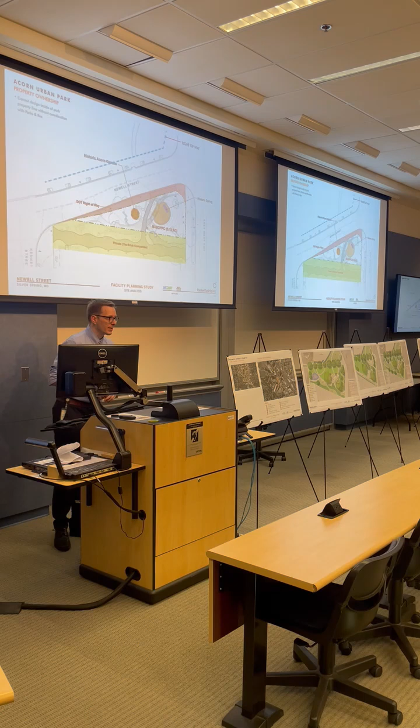So kind of start with what Matt was saying. First of all, nice to be here with everybody. So I remember some faces from last time. But we do want to be very clear.

So what we're studying is what's in the right-of-way up here, so it's really this study. It just so happens that Acorn Park and Newell Street and Acorn Park and this private walk here, they all tie together. So we're trying to look at this comprehensively and what could be. And so we took a step back. We said, what are different options that would make this better?

What we kind of heard from the first presentation was people liked the idea of this being a park. It worked well during COVID.

Families came out, there were kids out. You could actually use these spaces. Right now, you kind of have 2 small parks divided by a street. It doesn't feel safe for kids, doesn't feel like it's usable or user-friendly.

And you kind of see that in COVID, it got used. And now that the street's open, it's no longer used as much, certainly not to the extent it was before, and certainly not by kids, I think. So we kind of stepped back and said there's a lot of opportunities here, and I think we presented that last time.

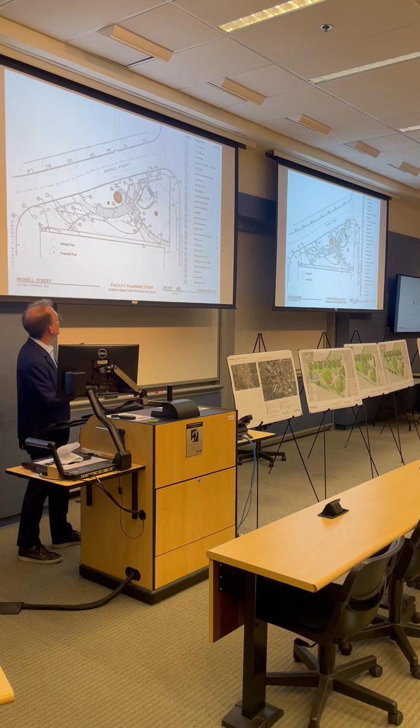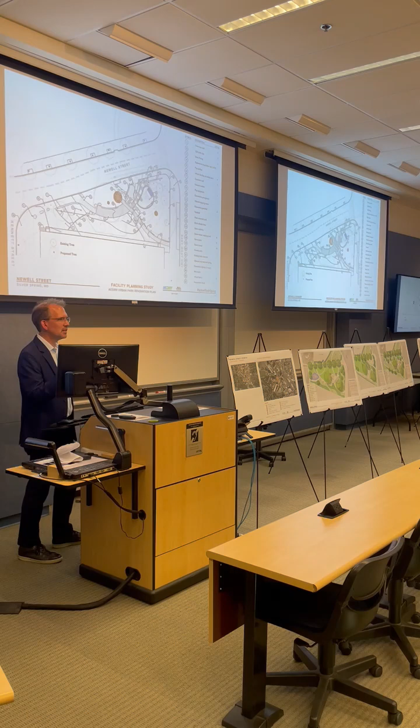Currently, Montgomery County Parks has a plan for the park, and they obviously had to work within the constraints of Acorn Park. There wasn't the ability to extend out into Newell Street or do some of the other more interesting things we see as opportunities here. This will all get coordinated with Montgomery County Parks. It's kind of, let's open our eyes and see what the possibilities are, and then we can work together with Parks and with MCDOT, and they'll come up with a final design at a later date.

These were the concepts we've presented before. You can kind of see one was the no-build option with minimal impact. One was let's close down the street and kind of link things. Circulation-wise through the park, it's separated - you have the street that separates the two parks.

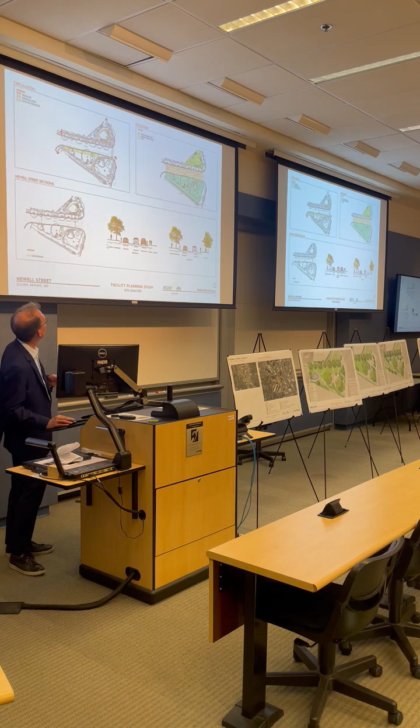Street section through it, you can kind of see what happens here. Right now we have 2 lanes of traffic and a turn lane, or 2 lanes of traffic, depending on where you cut that section. So it's a lot of pavement, especially where there's the turn lane, and it also creates a very large intersection, which I think makes this entire environment inhospitable. You've got 2 streets coming together, and unclear traffic patterns, which I think is hard for people to navigate.

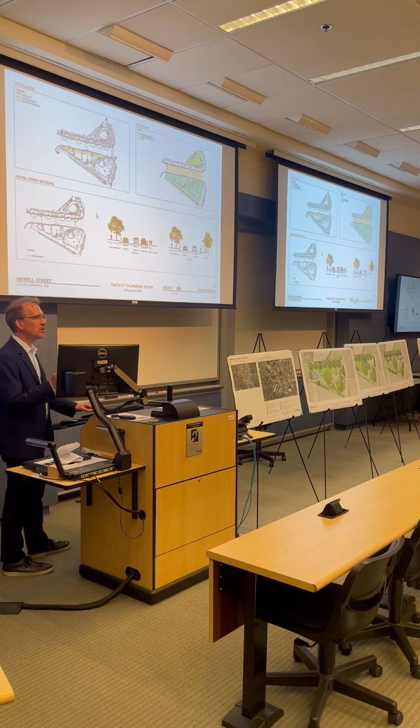So this is another opportunity to clean up some of that traffic pattern, which is where MCDOT said, hey, maybe we can do something here and make this better.

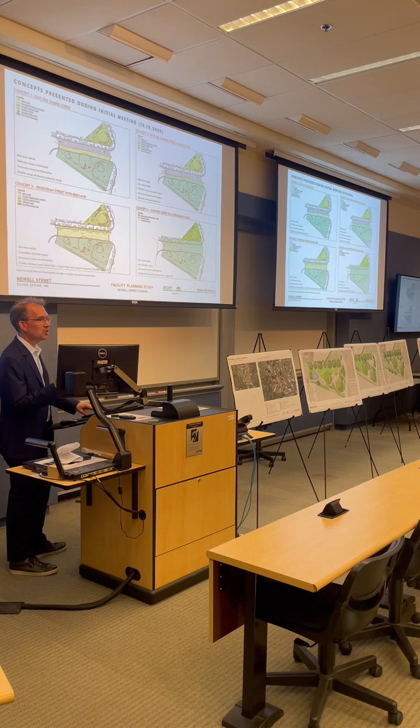These are the concepts we presented before. Concept 1 was like a one-way shared street with bike lanes. One was kind of close it and have shared bike lanes in the street with a one-way. This was a pedestrian street with bike lanes through it, and one was let's do a full park. You'll kind of see shades of these in all the concepts as we develop it, because we don't know that we can just close the street yet. There's a lot more study that needs to go in from transportation and more community input.

So after that first meeting, we heard a lot of things - people liked the idea of this closed street. In addition, there was the idea of just making a park, but also some people said, well, it's kind of nice to have some paved area for kids to ride bikes around, and to have other opportunities. Maybe a farmers market can set up. So I think we wanted to look at all different options as we go through this.

I'm not going to read through all this, but here's a summary of what we heard and the reactions to the different scenarios. I'll let you go through that, but it's in large part what we said - people liked that, but there was some concern about totally closing off. Some people would be okay with a partial closure, but I think that's to be determined.

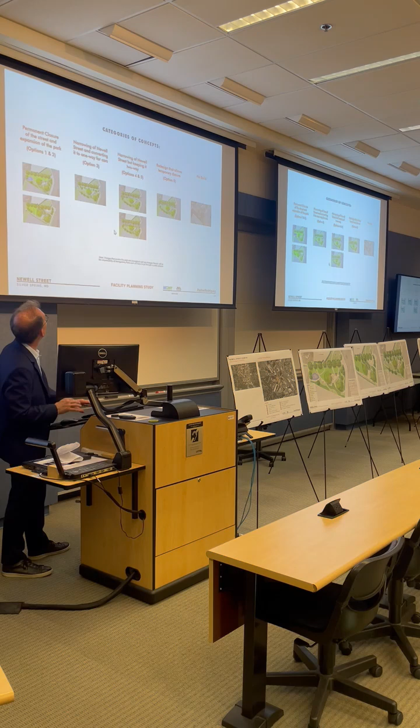So the proposed schemes we have here are just to spur discussion. This was kind of the permanent closure, linking Acorn Park and Acorn Park across the street with some different scenarios. This was keep narrow Newell Street to like one way for cars. Another one was narrowing Newell but keeping it two way with the bike lanes. And then there's kind of a temporary closure, just use it, keep the ability to have the street open. And then there's the no build option, which is always an option, especially if there's not funding.

So we kind of took our hats off and said, what if we tried to use the language of what's already out there in terms of the big sweep that comes through Acorn Park, used as a connecting element to the Acorn Park, kind of celebrate Acorn Park that's constrained on this side with existing street, keep the spring, and then use some of what Montgomery Parks came up with and bring that walkway into the spring.

This becomes the nexus of the design, with another walkway leading out to a nice open play field. We were also looking at doing a small play space for kids here—not quite a tot lot, but more natural or creative play for children.

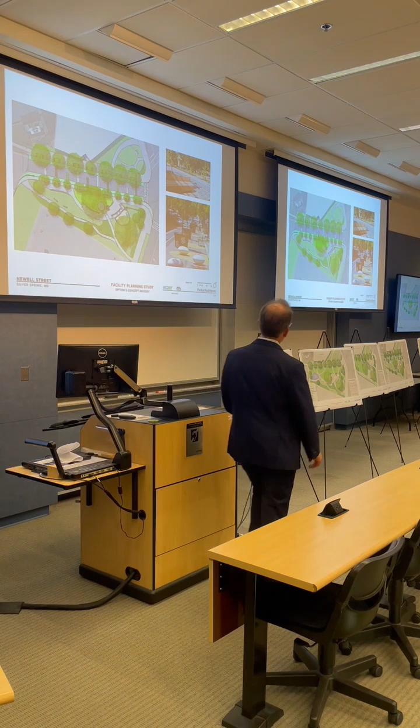I'll circulate through these fairly quickly. They're somewhat similar, but option 1 brought the park all the way across, and I'm just going to step up here. So if you look at option 1, this is really park from Acorn Park all the way to the building wall, and this is all green.

The fire lane that we're keeping would just be like grass. So you really perceive this as one large space.

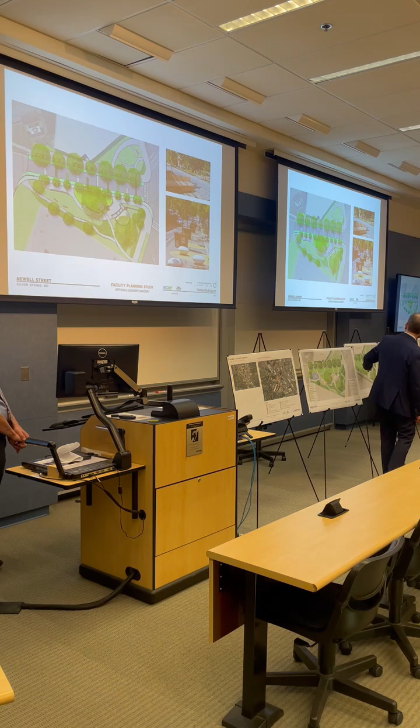This one was similar, but we're again trying to emphasize the Silver Spring and create a low point in here, and kind of give a reason that you could imagine when this was first founded, that water flowed out of the spring and it flowed out, and you could see the reason for Silver Spring, instead of it just being in a well.

This one keeps the street, but does more of an intervention with some of that larger furniture and kind of picking up on the stream and really making the park as wide as we could possibly make it, but providing a vehicular lane through.

This one keeps the street as a definitive street, adds this edge to the Acorn Park, so it enhances Acorn Park, but it doesn't really connect these parks, which I think is kind of the problem that we saw last time. This keeps 2 lanes, keeps a bike lane, and we're also keeping the curbs for the most part. So it's much less of an intervention.

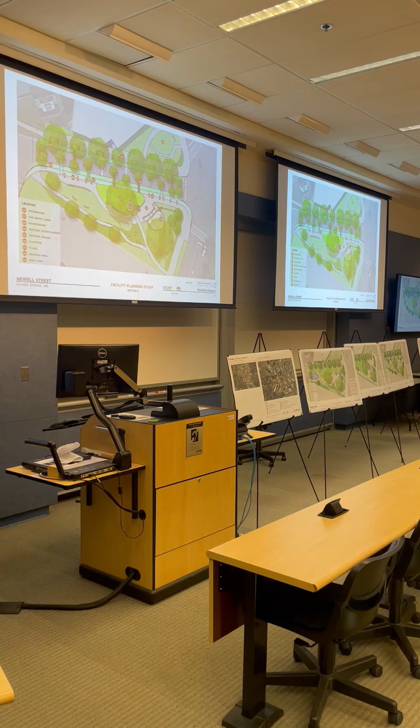It's kind of what we did during COVID, but with a bit more of an enhancement that doesn't make a permanent closure of the street. And again, you could close this for a fair, but I think it's largely the street is open, but with enhancements. And that's kind of a step back from just keeping it as it is, or the no-build scenario.

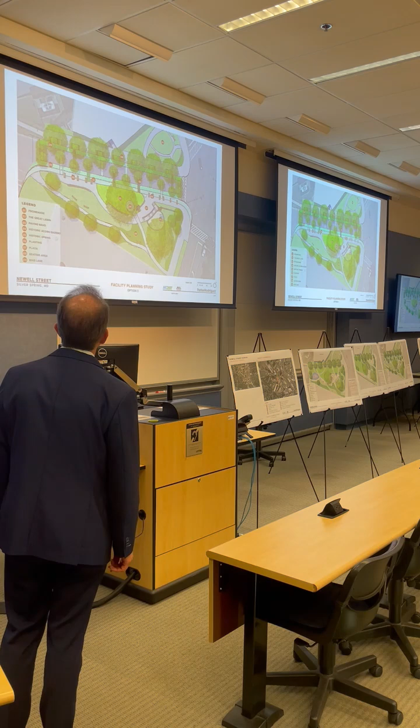And that's what this scenario is showing, right? This is showing it with the planters moved out so that the street's blocked. So this would be a scenario where the street is there, but some event is happening and we've closed it for the day or for the weekend or whatever. That's what this concept is showing, is the moving of those planters to block the street. But that would not be a full-time closure.

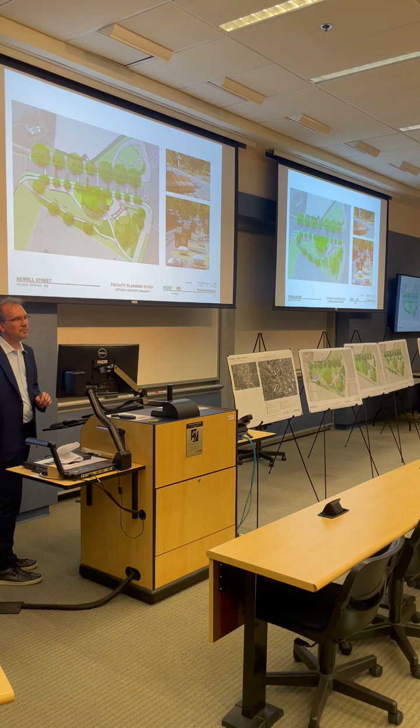I think that's something that could be determined later. These are just concepts, not final. The idea is to figure out, does Newell Street need to be 2 lanes wide, or could we make it a little bit narrower? If it was just 1 lane wide, we could use that other space to expand the park.

Which direction it goes is something that would be determined at the design process, which is not funded. You might have come in later, but the design process is not funded yet. So it could be either direction. If you have a thought on which way you would like it to go, that would be a great comment for us. I want to get to the presentation slides first, and then we'll take more questions.

We're almost done here. So here you can see some of the larger planters that can get moved in, and then like Matt was saying, they can get moved out into the street to kind of close that off. So this idea of we'd have movable planters, kind of akin to that.

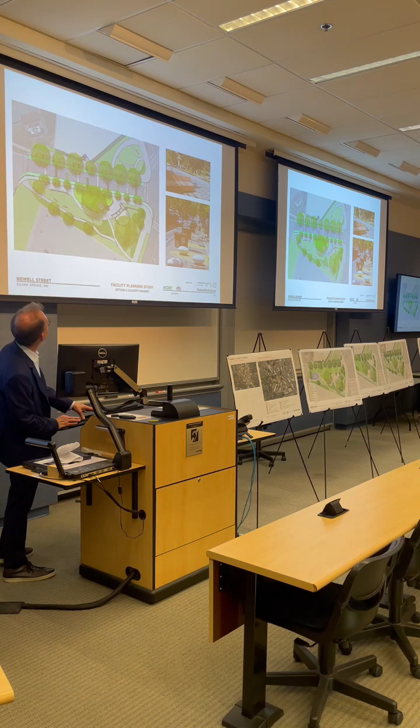They definitely become traffic barriers within that, but then you also have other seating that kind of gets positioned in. These are just concepts, and then you can have some other permanent seating along that edge that kind of enlivens it. But here you can see we're trying to create like a promenade on one side and then still have the street open on the other.

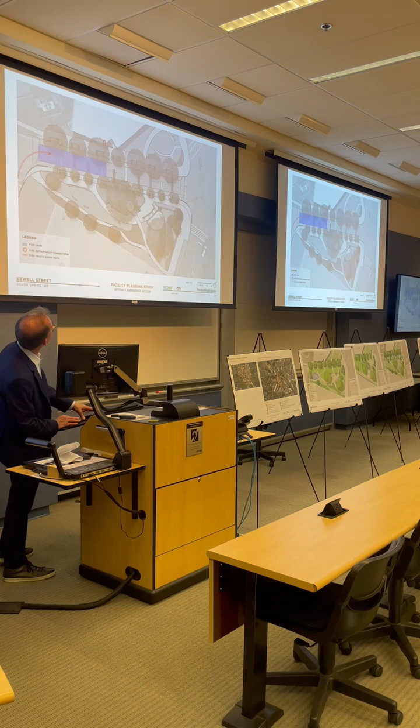All of these, we tried to facilitate as much circulation as possible. I think with the street scenarios, we lose that ability to cross the street. And that's really kind of the shame of all of this, is that you just are not able to knit it together the same way.

But I think it's a public process. There's a lot that needs to be done, from a political level, from a funding level, and it's just to kind of give ideas. If you can't see a way that it could be used, you really don't know what the possibilities are. So these were just, we tried to make them as varied as possible, just to give feedback, and then we look forward to hearing your comments.

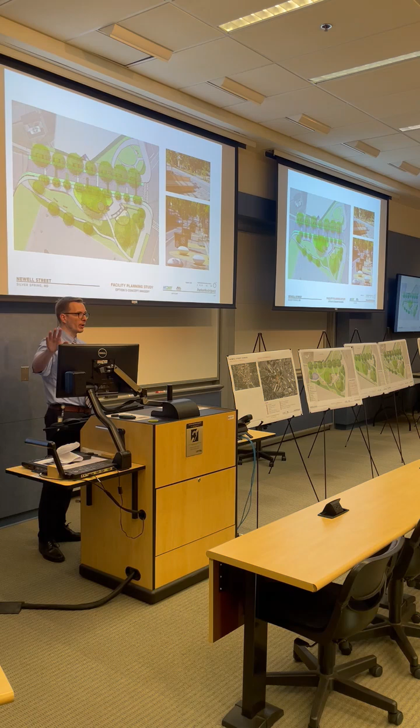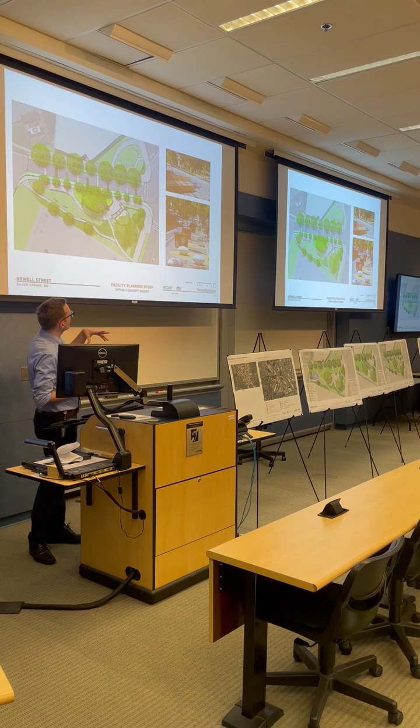Let me repeat the question for the people who are watching later. The question was, how many lanes are here in option 5? This is leaving the curbs alone. There would be 1 lane in each direction and then a bike lane. So instead of having a separate left turn lane at East West Highway, there would be a single lane approach and there would be bike lanes on either side. That's the difference. And that kind of space could be more easily closed, as Dan was just saying.

Right here. I've never done one of these before, so just to clarify, the way to officially submit one's opinion is to come up and talk to you guys after.

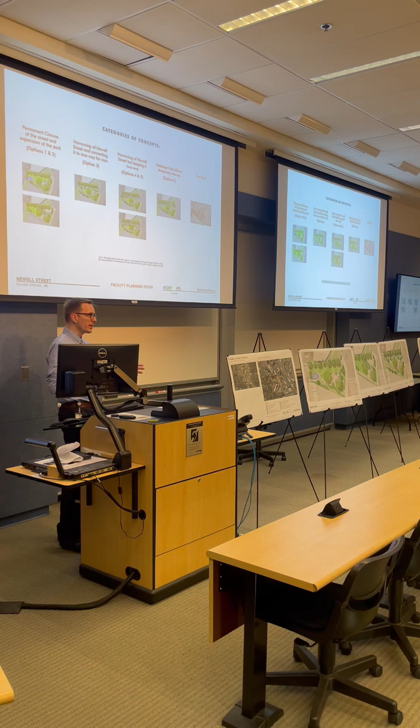So that would probably mean less delay for Blair Mill. It would probably mean less delay for East West Highway. Now, if you're trying to go down Newell Street, you have to drive around the block, that might mean more delay for you specifically, but that signal would operate more effectively.

Also, if one of the options were for Newell Street to be one way, going away from the intersection, that would also simplify signal operations. If it was still approaching the intersection, if it was one way going into the intersection, it would still have to have that extra phase. But yes, the more phases you have, the longer that signal delay is going to be.

I'm going to take one last question, and then we'll let you all come up and talk to us one-on-one right here. Sure, thank you.

Just a comment, really. I think there's a lot of careful thought that has gone into this. There is something completely unknown that's going to have a very big impact on Newell Street, and that's what the development at 8001 will eventually be. So I think any consideration of what happens at the intersection we're discussing today, and that piece of street, I feel is premature, and I think it's not fair to the people that live along Newell to go ahead and make a decision about this street that's permanent without considering what's going to happen at 8001.

That's my comment. So the comment was, we don't know what's happening at the future development at 8001, and this is premature.

So what I'll tell you, that's a good question to segue into what the schedule looks like. As I mentioned, there's no funding for design or for construction. The County Council just adopted the FY25 to FY30 budget in May, 2 months ago, and it became effective on July 1st, which was last Friday. The earliest that any money could possibly be added to the budget would be in the off-year cycle next spring, but it's very unlikely that money would be added.

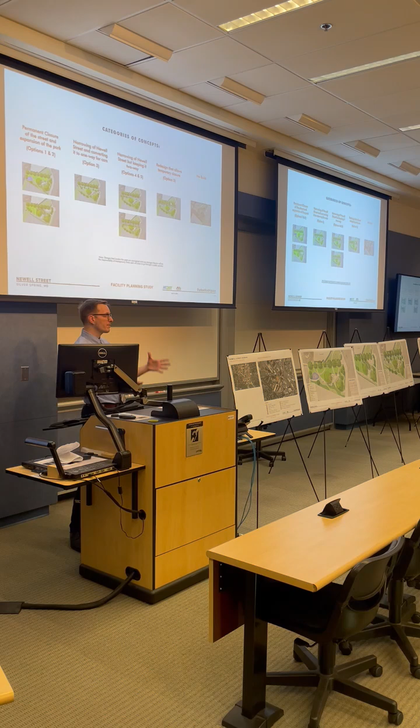There's never going to be a time where Silver Spring is completely fully formed and done, where we know what it's going to look like. There's always going to be something coming down the pike. When this goes to design, careful consideration will be given, and also when 8001 comes in for its development approvals, the planning department will give careful consideration to what Newell Street is planned to look like, what it does look like. There is the possibility that 3 or 4 years from now, if design funding is added, we may say we know the community wanted it closed, but things have changed and we want to do something different. That's also possible. But the point of this facility planning study is to look at what the possibilities are and what direction the community wants to go in.

And Patricia, did you want to add anything? Yes, thanks Matt. Jim Chan and I are here with Parks, and we just wanted to give you an update. We have another new park on the other side of the brick company building that is in planning and design, and it's going to go to construction very soon. There's going to be a lot more active amenities in that park, so we thought we'd give an update on what's going to be in that park as we think about some of these options for this park.

Good news, finally we bought a 1-acre property in the neighborhood. We're working very hard to develop this brand new urban park that will have a lot of active programming, places for people to gather. Included in the program, we have a picnic terrace, a promenade, a game area, a small dog run, a great lawn, playground, fitness area, and barbecue.